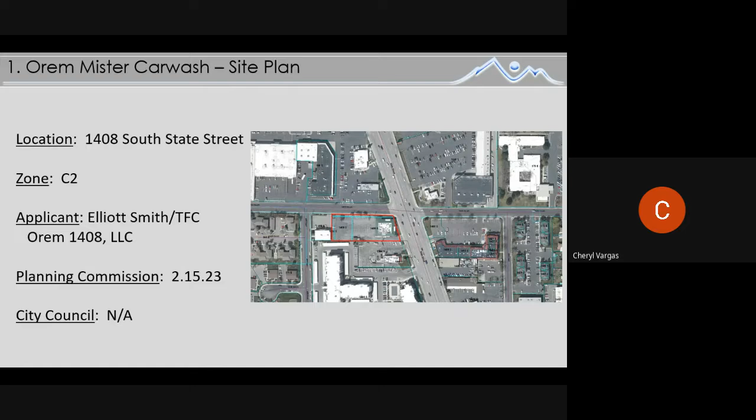Okay, first one up. I know you've seen this three times, but you haven't really seen the whole thing three times before. Orem Mister Carwash, 1408 South State Street.

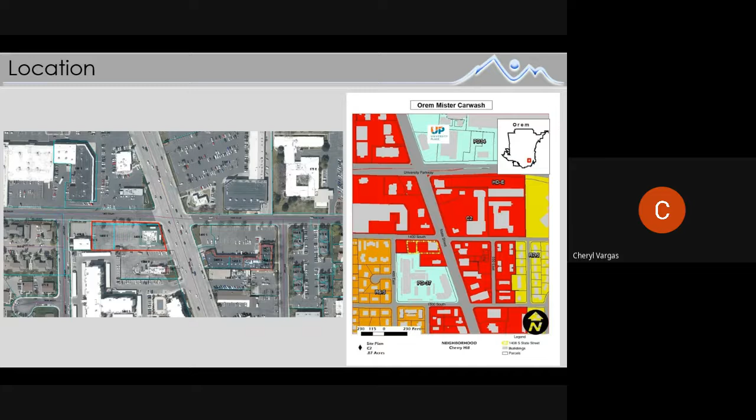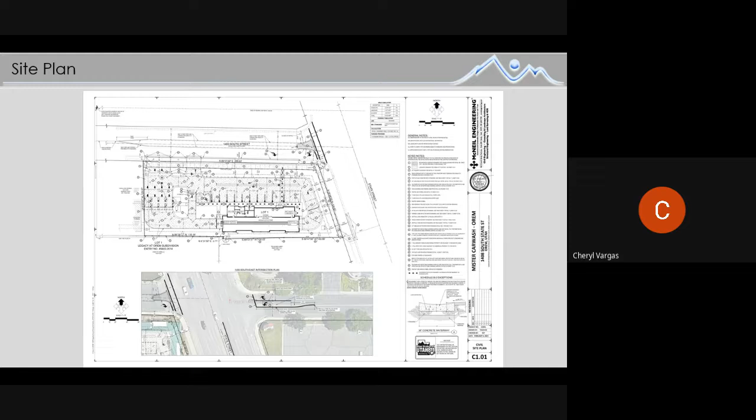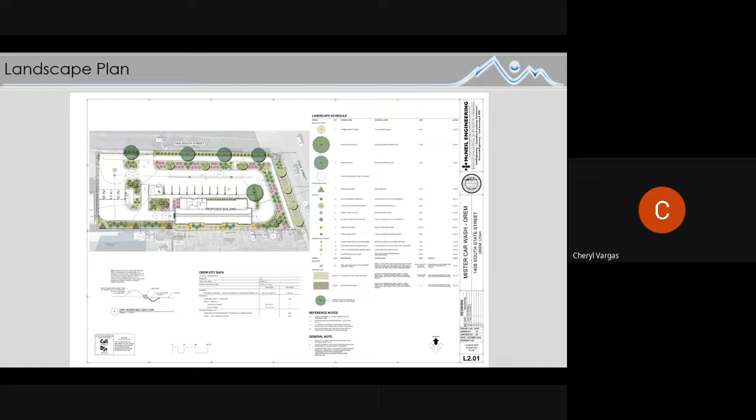Any questions on any of that? I know they've been working a lot with drainage, and they had a lot of UDOT issues—those are the two big ones. There will be no access at all to State Street. It'll all be access from 14th South, no in or out from State Street.

Any questions? Can you go back and look at that east side of 14th again? This one? Yeah, that's just paint on the east side there. The only median is this little weird shaped triangle. They're just doing the stormwater project in that intersection. I didn't want to interfere with the contract he had last week. Thank you. Okay.

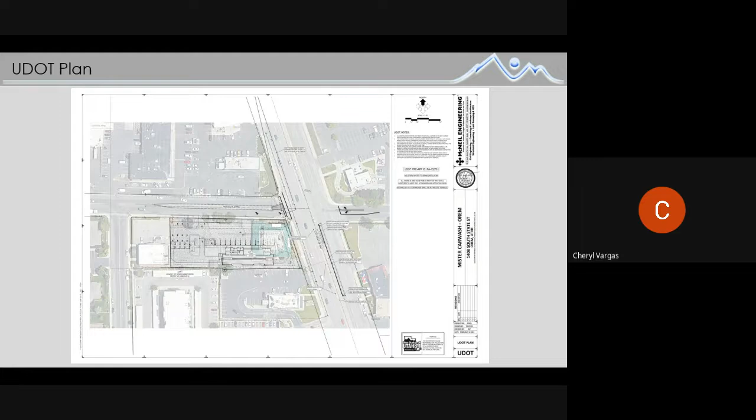Motion on this item? I'll motion to approve the site plan and the final plat for the Orem Mister Carwash, located at 1408 South State Street in the C2 zone. Do I have a second? I'll second. All in favor say aye. Aye. Aye. Any opposed? It passes.

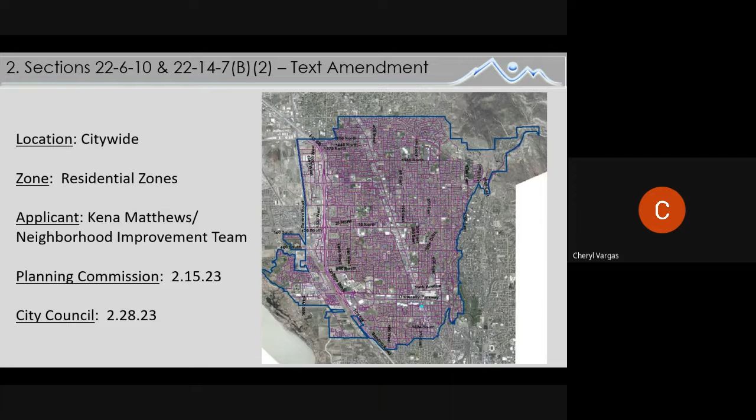Item number two. Item number two is a text amendment brought from the neighborhood improvement team. Parking on gravel is a big issue in the city, and it's also very hard to enforce, so they've asked that we allow gravel parking strips next to driveways.

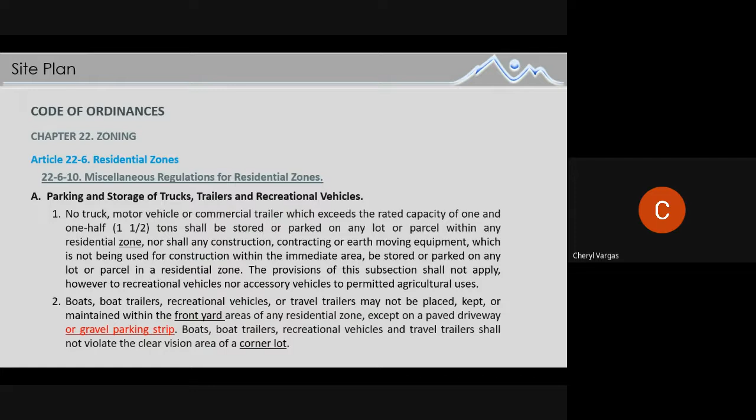This is the language where it adds in the gravel parking strip, and then they're adding a whole new section of the code under N. They will not be able to cut the curb. It'll be next to the primary driveway—can't be its own driveway, and also cannot be the main driveway. It can only be a parking strip next to an existing main driveway. They have to have barriers between the neighbors. Pretty much you can go through that.

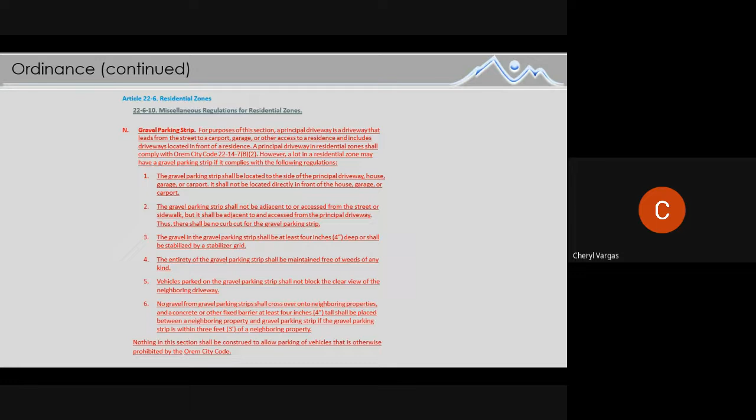Are there any questions on any of that? It's just so that instead of having, concrete is expensive right now—concrete's hard to get right now—they just need options, alternatives to concrete and asphalt. Can't pour asphalt in the winter, of course. Any questions, comments, issues?

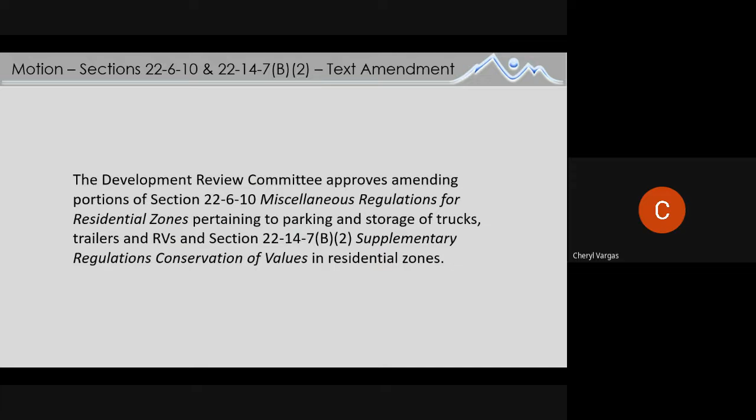So entertain a motion. Dan? No? I'll make a motion. The Development Review Committee approves amending portions of section 22-6-10, miscellaneous regulations for residential zones pertaining to parking and storage of trucks, trailers, and RVs, and section 22-14-7(B)(2), supplementary regulations, conservation of the values in residential zones. I'll second that motion. All in favor say aye. Aye. Any opposed? Okay, item number three.

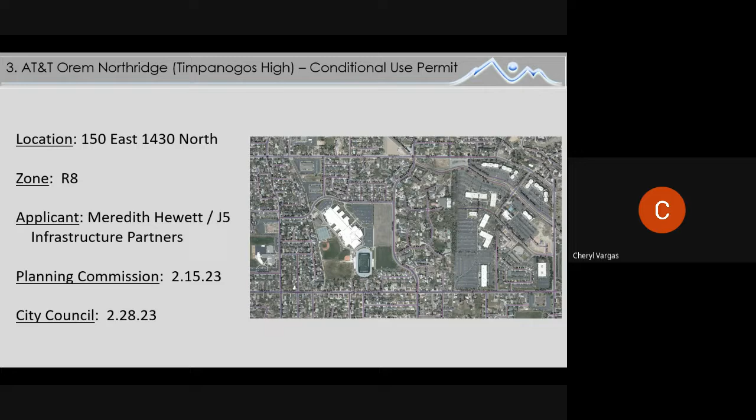Item number three is another cell tower at another high school. This is Timpanogos High. There's an existing monopole to the north, and this new proposed one will be further south. It's approximately 250 feet from that residential area. That northern vacant area is now Mountain Grove subdivision, about 22 to 25 homes in there. I can't remember, but it's more than 115% of the height of the pole from that residential zone.

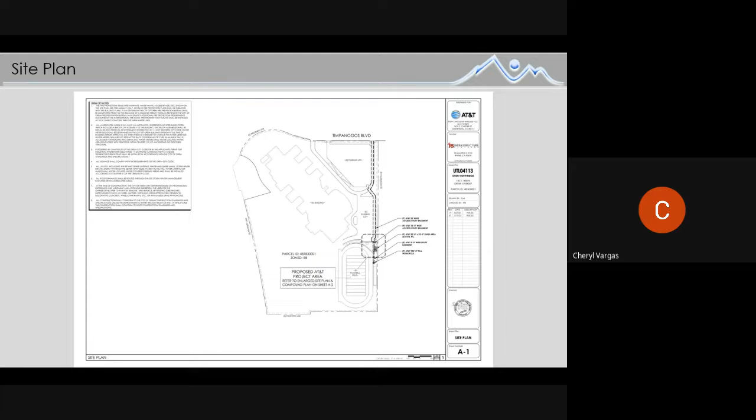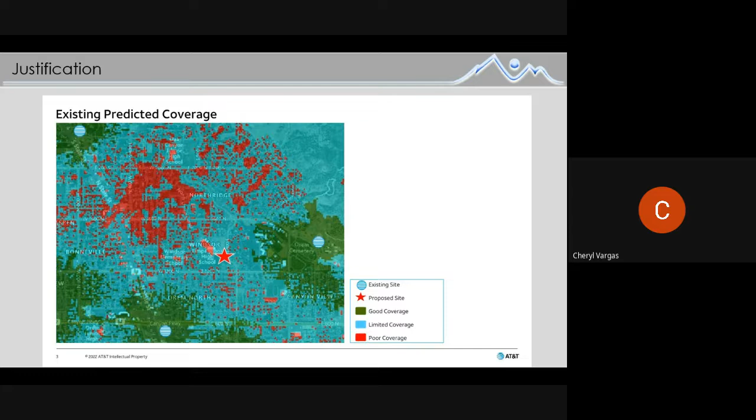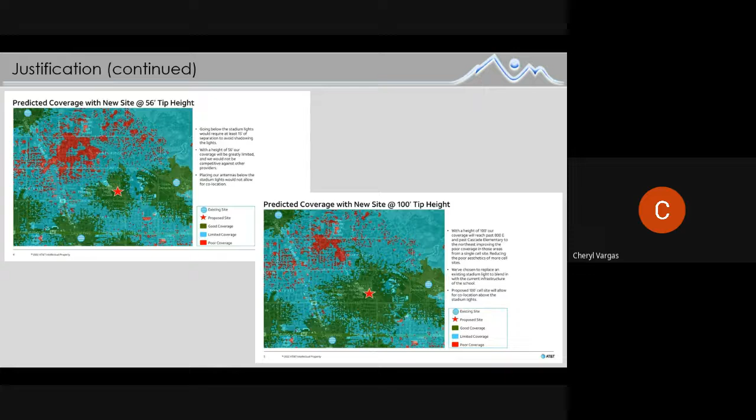And I called and asked them, because as you can see, there's an existing pole. I called and asked why they couldn't co-locate on that pole, and she said based on that pole structure, it is maxed out—you cannot put anything more on that pole. So the pole wasn't designed for co-location. Right, okay. And they can give me something in writing. We may want that for planning commission from their structural engineer. Okay.

So is there a new pole co-locatable then, or will they have the ability? I don't think so, because she said on top of stadium lights, it's not like a monopole—when it's on top of stadium lights, it's more restricted on what they can put on it because it's not as strong.

Any questions on any of that? Okay, have a motion for this one? I'll motion that the Development Review Committee approve the AT&T unmanned telecommunications facility co-located on a field light at Timpanogos High School, located at 150 East 1430 North in the R8 zone. A motion to have a second? I'll second that. Okay, all those in favor say aye. Aye. Aye. Okay, approved.

Any comments, or do I have a motion for the minutes from last meeting? What was the date on that, Amy? January 23rd. I'll make a motion to approve the January 23rd DRC minutes. Okay, second that. All in favor say aye. Aye. Any opposed? One opposed.